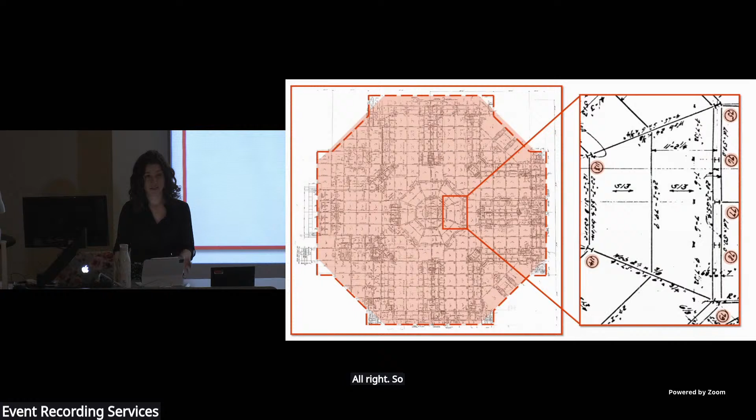All right, so the original building is octagonal, but it technically has 16 sides as the octagon is intersected with a cross. The building is organized on a rectilinear column grid, and one of my favorite pieces of trivia regarding this is that instead of identifying locations with column grids, like you see normally, they numbered their columns. 75, 76, 77, 78, 79, column 113, and column 114.

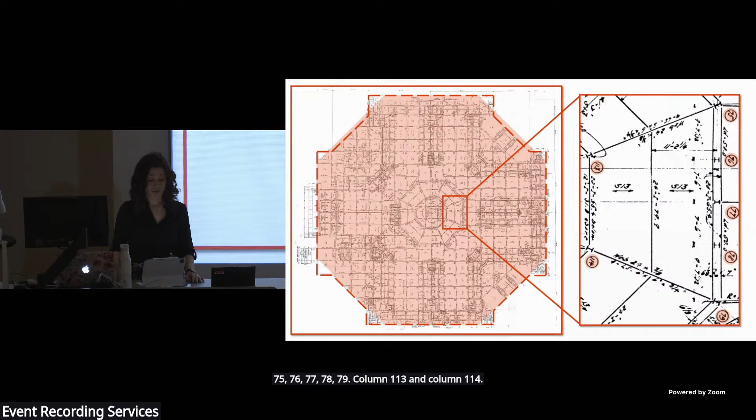Shedd still uses this numbering system today. If you go into their building in the back of house spaces, you will see the columns with their number painted directly on them. Later, we will talk about columns 227, 228, and 251A, and column 88.

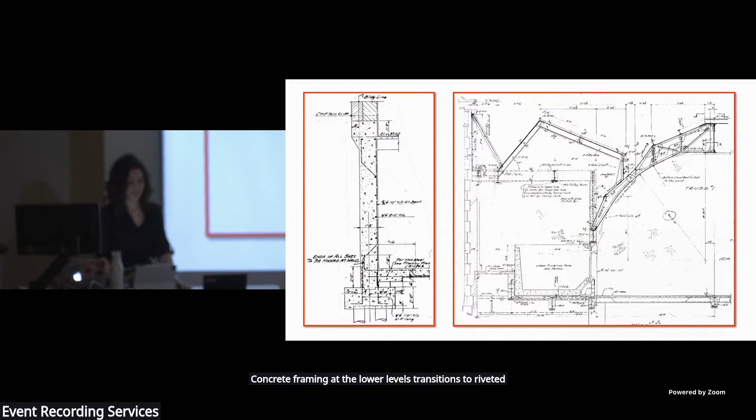All right, the building is supported by a hybrid structural system. Concrete framing at the lower levels transitions to riveted steel framing encased in concrete fireproofing at the main level and roof, with a 5-wythe load-bearing unreinforced masonry wall forming the building's perimeter and lateral system.

The structure rests on composite timber and concrete piles, and at the roof level, these are skylights that are over the original exhibits, and then this is a 10-foot tall parapet wall, which fortunately has an embedded steel frame that is braced back to the roof.

Much of the lower level of the basement was originally designed as reservoirs to store and filter the water. The original basins were located in these areas, and I know you can't read it, but they say live load of 500 pounds a square foot.

That's in the basement. Interestingly, in 1930, Shedd's saltwater exhibits were stocked with seawater, not by adding salt to Lake Michigan water, but by transporting nearly 1 million gallons of water by train from Key West to Chicago. Now, Shedd makes their own saltwater on site.

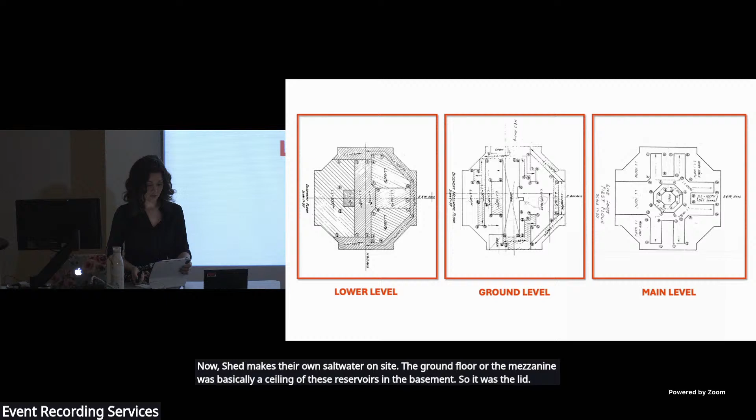The ground floor, or the mezzanine, was basically a ceiling of these reservoirs in the basement. So it was the lid. It was a 5-inch thick concrete slab, 33 KSI rebar. It had a live load capacity of 10 pounds a square foot. Now, if you think about current code, a live load of 10 pounds a square foot is for uninhabitable attic spaces with no storage.

This limited slab capacity has created many challenges for Shedd over the past 5+ decades specifically, and we'll talk about some of them in more detail later. Some locations have a live load of 50 pounds a square foot. These were drive aisles for the trucks that had the seawater to come dump them into the basins below.

And as mentioned, above the ground floor, you transition to steel framing, and then here's your main level, and you can see how they delineated these public spaces into each a gallery, and then behind the scenes spaces in the corners. They all have the same live load of 100 pounds a square foot.

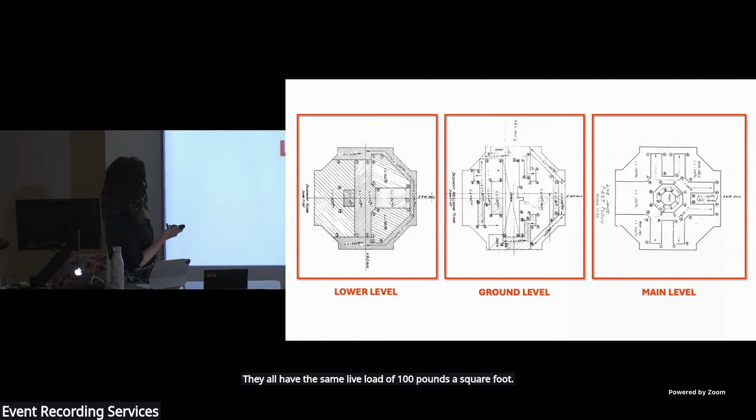All right, beginning around the 1970s, multiple renovations and additions have altered the building structure, expanding the useful floor space within the original footprint and increasing the aquarium's capacity to house animals. Klein and Hoffman has been involved in most of these projects since the 1990s.

Oh, whoops, wrong button. There we go. This button.

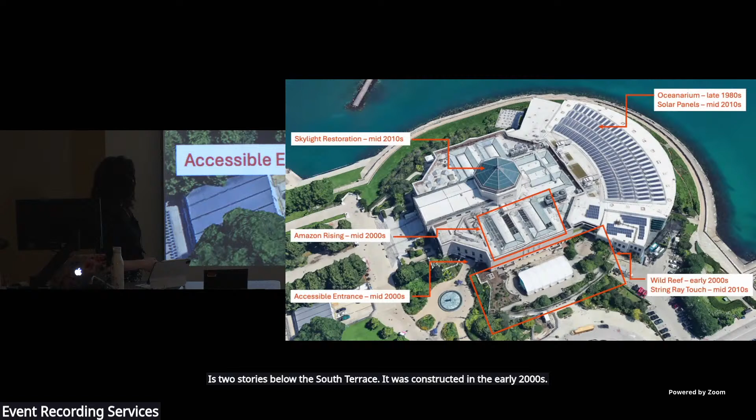So the Oceanarium was the first major addition. It was built in the late 80s and opened to the public in 1991. Wild Reef is 2 stories below the South Terrace. It was constructed in the early 2000s. The accessible entrance was added in the mid-2000s, and then here's this sculpture. It's called Man with Fish.

Amazon Rising was done in the mid-2000s. It completely redid the entire South Gallery. And then in the mid-2010s, the Rotunda skylight was completely replaced. It improved its function, and it also restored original design elements that were lost during the prior skylight replacement in the 1960s. Solar panels were added to the roof of the Oceanarium. It was the first such installation in the city of Chicago.

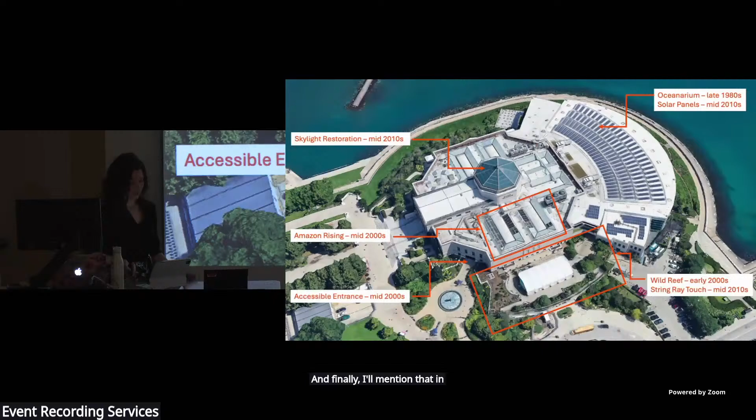And then the Stingray Touch was added to the top of the South Terrace. This is a seasonal exhibit, May through October, I think. And then a myriad of other exhibit enhancements and behind the scenes concrete repair, waterproofing, masonry repairs, way too many to list, that we've been involved with in our 30+ year relationship with the aquarium. And finally, I'll mention that in 1987, Shedd was placed on the National Register of Historic Places.

All right, so as you can see, Shedd has been very proactive in adapting its building since its opening almost 100 years ago. And ahead of its centennial year in 2030, Shedd Aquarium unveiled a strategic plan called the Centennial Commitment to accelerate its mission and prepare the iconic institution for the next 100 years of service. The plan includes an ambitious experience evolution that will restore the aquarium's historic architecture, modernize the experience for guests, upgrade life support technology, and create more expansive, realistic habitats for animals.

The experience evolution process began in 2018 with an extensive research and master planning process aimed at redefining the visitor experience while maintaining a deep commitment to animal care. A multidisciplinary team, including experts in human factors design, exhibit design, and architecture, created a visitor-focused, actionable plan. As the project progressed, the design team expanded to include 18 specialty consultants, necessitating careful collaboration at every stage.

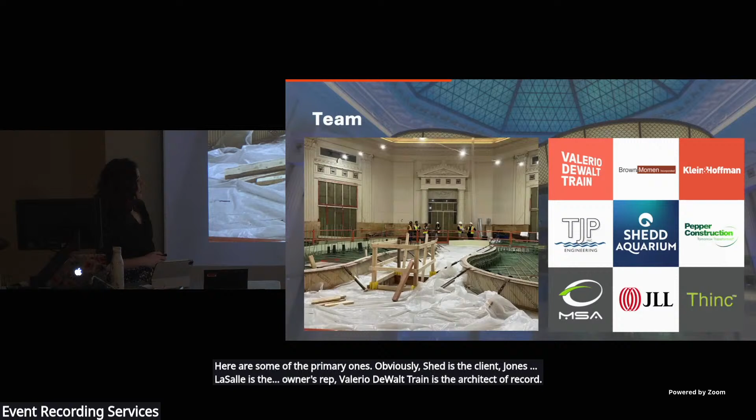Here are some of the primary ones. Obviously, Shedd is the client. Jones Lang LaSalle is the owner's rep. Valerio Dewalt Train is the architect of record. Brown & Momen and Pepper Construction are a joint venture GC. TJP is the life support systems engineer. That is everything that goes into the animal habitats, so the filtration systems and things like that. MSA is your mechanical engineer, and Thinc is the exhibit designer.

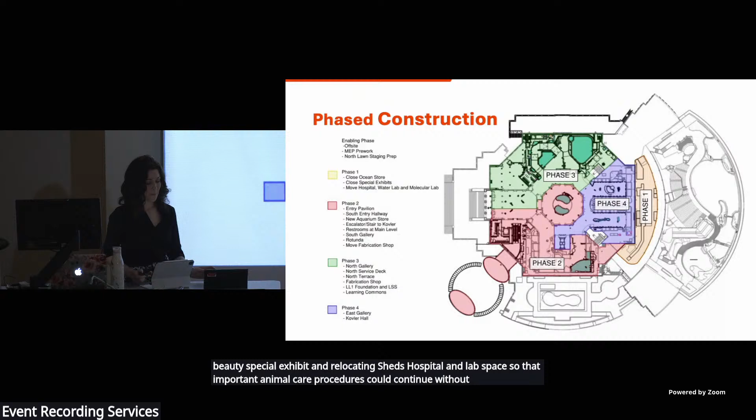All right, so the experience evolution is split into 4 phases, or really 5 if you want to count phase 0, which was an enabling phase. So what that means is before construction began, the aquarium temporarily relocated animals from their public habitats to environments behind the scenes where they could continue to receive quality care while their new habitats were constructed. Phase 1 was also behind the scenes. It involved closing down the Underwater Beauty special exhibit and relocating Shedd's hospital and lab space so that important animal care procedures could continue without interruption. We'll dive into phase 2 in a minute.

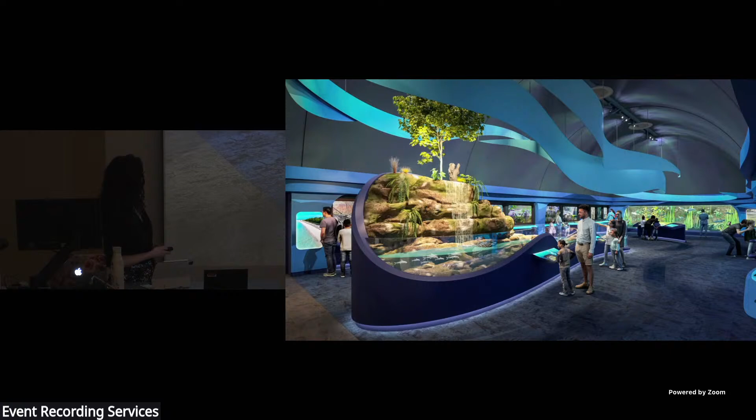The project is currently in phase 3, which completely reimagines the entire north section of the building. And here are a couple of renderings that have been released to show what's to come in phase 3, which I believe will open in 2026. Phase 4 is probably the smallest phase in terms of cost and scope, and it primarily involves non-structural exhibit enhancements to the original East galleries. And it also will be when the entire Kovler Hall is reopened. All right.

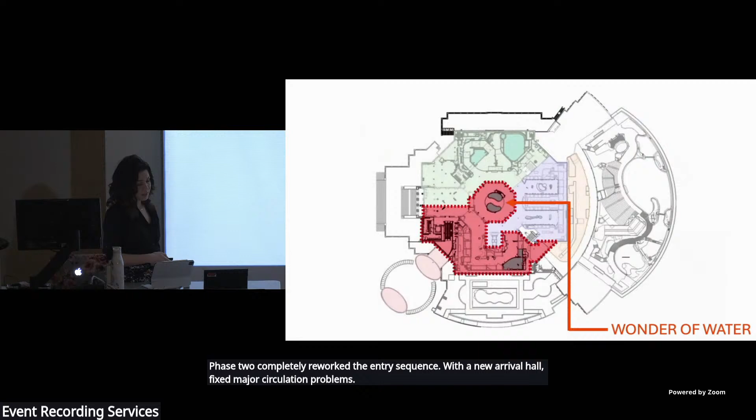Throughout construction, Shedd has remained open. This is a logistical feat requiring precise coordination to maintain animal support systems, visitor pathways, and operational back-of-house spaces. Every phase prioritizes visitor access and uninterrupted experiences. Now, back to phase 2, the topic of this presentation. Phase 2 completely reworked the entry sequence with a new arrival hall, fixed major circulation problems, and reimagined several exhibits, like the center exhibit and the Arapaima habitat in the South Gallery.

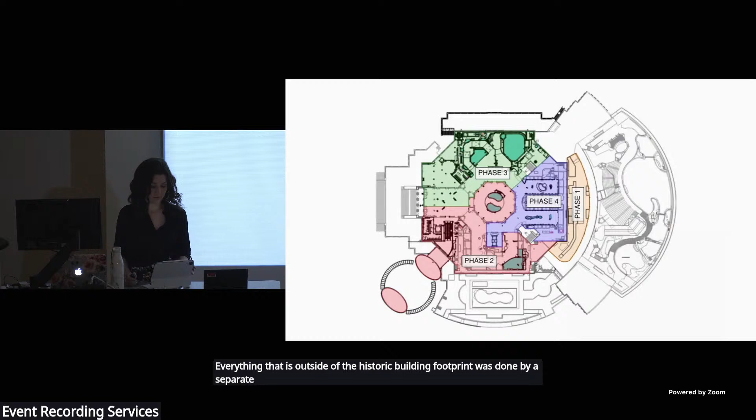All right, you may have noticed that I have not mentioned this little piece down in the southwest corner. This is the new ticketing pavilion, entrance pavilion, and then these trellis features that surround the Man with Fish sculpture. Everything that is outside of the historic building footprint was done by a separate engineer of record. It's kind of unique to this project, but in this case, Thornton Tomasetti designed the entry, ticketing, and trellises.

And maybe someday you can hear Thornton Tomasetti talk about this project because it was challenging. Even though it's small compared to everything else going on in the historic building, there were so many challenges. They had to redesign foundations about 3 times due to undocumented obstructions below ground, but that's for another time. Maybe that'll be a tease. You can get another speaker. But I can give you a little bit of background information on that entry.

So when Shedd was first constructed, the main entrance was through these grand stairs on the west. However, once the accessible entrance, which is here on the southwest corner, was added in the early 2000s, that became the primary point of entry. And then during the master planning in 2018, research did confirm that 85% of visitors do approach Shedd from the south, prompting the creation of a new plaza for a seamless, accessible arrival experience.

The landscape plaza and lightweight trellis unify the outdoor space while preserving sightlines to the historic 1930s building and incorporating wave-like motifs in the trellis that you can see there, complementing all the other aquatic motifs found throughout the building. The pavilion roofs are delicately positioned to maintain views with materials selected to complement the white Georgia marble of the original structure. All right. Now, once inside the building, the handcrafted plaster wave wall right here extends that plaza's trellis motif, creating an immersive aquatic aesthetic in the beautiful interplay of light and form in a brand new 2-story arrival hall.

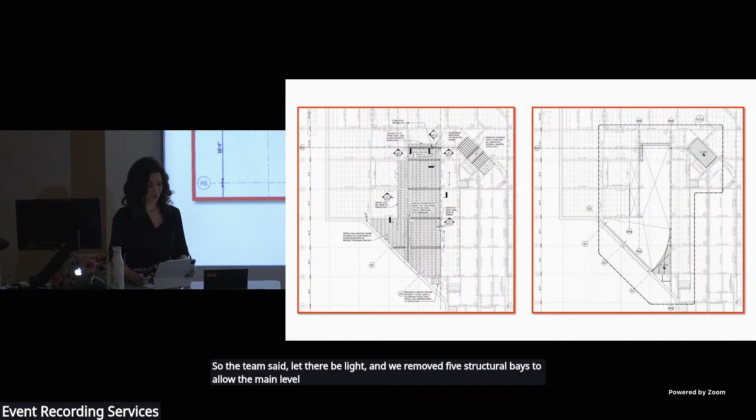This area was previously pretty dark and somewhat uninviting, and a stated goal of the experience evolution was to establish an open, welcoming experience. So the team said, let there be light, and we removed 5 structural bays to allow the main level windows to bring daylight into the new entry hall. So let's talk about how we achieved this.

So removing floors is always good for your gravity loads. It takes load off your columns, it takes load off your foundations. However, it means that you now have columns with double the unbraced length. So we had to check all those, but fortunately they were robust enough that we did not need to reinforce any of them.

As I've stated before, the perimeter masonry wall is load-bearing. You can see up here how the roof framing frames right into the wall. And it's also the building's lateral system. And it has a 10-foot parapet wall, I mentioned that earlier. So removing this floor down here, though, means that this wall is now 32 feet tall, unbraced for out-of-plane wind load.

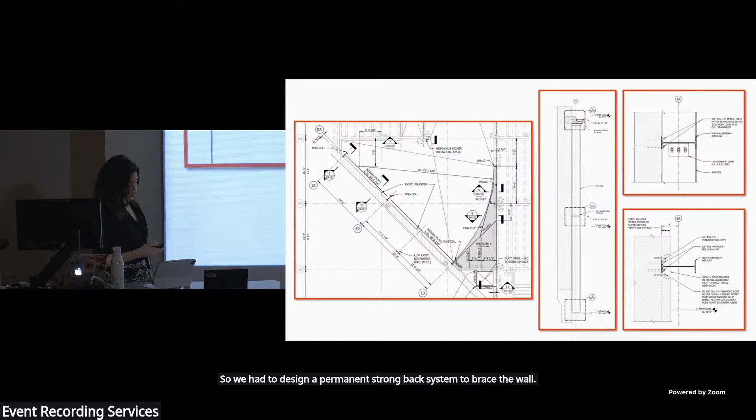And even though it's 5 wythes and it has pilasters every 16 feet, it's not going to work for that kind of span. So we had to design a permanent strong back system to brace the wall. And so if you'll notice, basically we installed columns.

I gotta get this button right, boss. Back, there we go.

So we basically installed columns roughly adjacent to where the pilasters were, and then the whaler is turned sideways so that the strong axis is oriented parallel to the applied load. We also had to mechanically attach the whaler to the wall for pressure and suction.

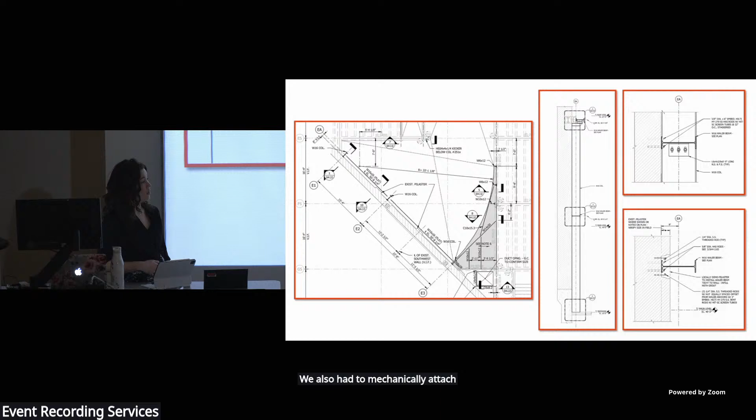Some modifications were required at the roof level due to the original drawings not being completely detailed, and so once the demo of the ceiling happened, we could actually see the roof structure. We knew that some of our original details weren't going to work. So these ones up here were not our original design, but you can see that the actual installation matches pretty well. That's always nice to see when you see your 2D drawing in 3D real life.

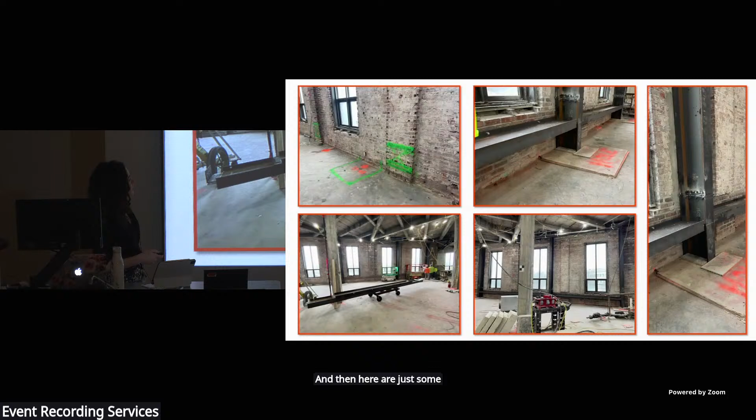And then here are just some photos of the process. So again, the strong back system had to be in place before the floor could come out. So what they did is they demoed small portions of the slab to install the columns. They had to demo part of the pilasters so that the whaler could sit flush against the wall for the whole length.

Once they got the columns installed, they did their splice, and then here's the horizontal whaler getting ready to be installed. Once everything was in there, you could see the bolts connected there, then they could take out the floor. Yeah, there's the strong back system in orange. There's so much going on in here, it's kind of hard to see without that highlight.

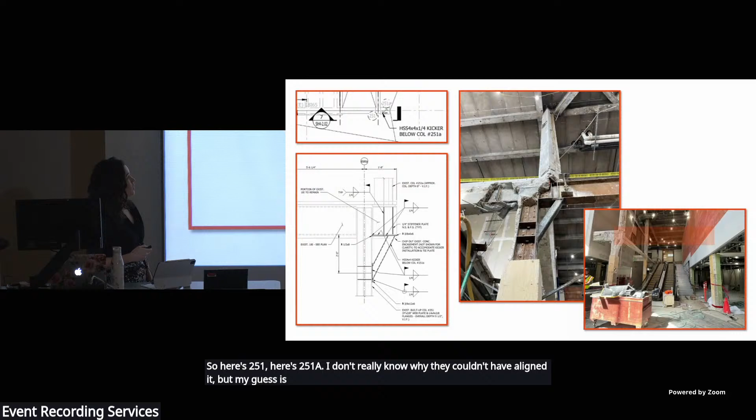Now, before I get into the escalators and the stairs, I want to talk about this column. It's a little hard to tell in this image, but the enclosure around this column is substantially wider than this one. Now, why, you ask? Well, I'll tell you. This is column 251A up at the top, right here in plan, and you can see that it is off-center and skewed from column 251 directly below it. So here's 251, here's 251A. I don't really know why they couldn't have aligned it, but my guess is putting 251A at this location simplified connections up at the roof level, and they probably never thought that this girder was going to want to be removed.

So we were supposed to remove this girder because it's right in the middle of our double height space, but we couldn't remove all of it. And this is not a moment connection, so we had to install this kicker to resolve that off-center load. So once all that was installed, then they could cut that girder, and you'll see it is gone from there.

All right, so now back to the escalators. So we had to add framing at the top of the escalator to support the operational load of the truss, the escalator truss, and also to support the edge of the original floor slab that we had cut back. So if you'll notice in this detail, here's our plan, and here's the section. If you notice, we have a tube and a wide flange shape.

That was not the original intended design. Originally, this tube was located where it needed to be for the escalator, and then the floor slab was supposed to be cut right on the other side, and then this little stiffened angle down here was supposed to support the floor joists beyond it.

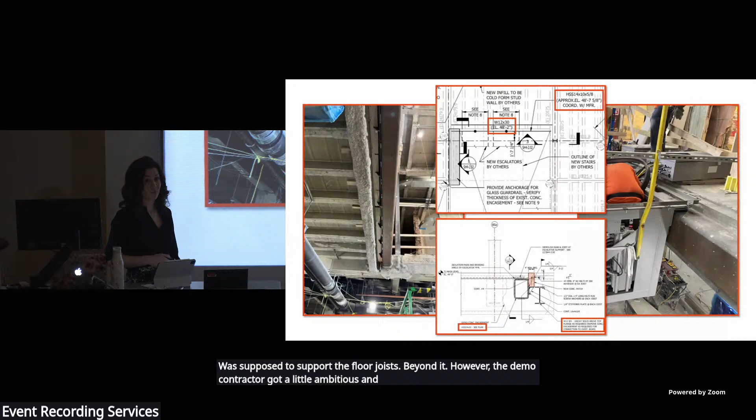However, the demo contractor got a little ambitious and demoed the slab back before he had coordinated the exact location with the escalator manufacturer. So that meant when it was all said and done, the opening was 4 inches too big. So the simplest solution at that point was to specify a separate member, in this case our W12, which is right here, to support the edge of these joists that had been cut. And then that stiffened angle on the side of the tube is now just supporting that 4 inches of new concrete that we had to infill.

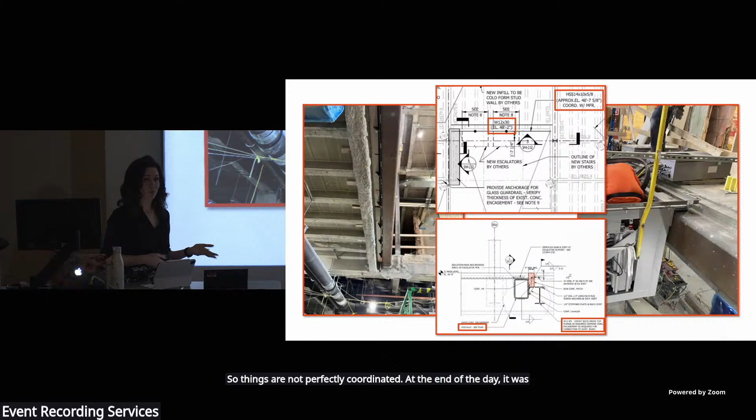So stuff like this happens, right? Things are not perfectly coordinated. At the end of the day, it was the general contractor that should have pointed out to the demo contractor where he should have cut, but it happened. It's 4 inches. You got to work together as a team to come up with the best solution for the entire project. So that was one small little change we had to make there.

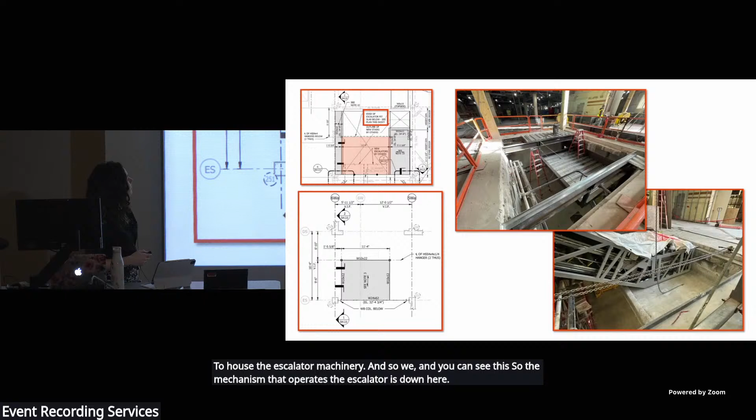Then at the bottom of the escalator, we had a pit to house the escalator machinery. And you can see this, so the mechanism that operates the escalator is down here. It's a little hard to tell from this photo, but we had to make this as small as possible, as shallow as possible, because this space below here is an LSS room, life support systems room. So the equipment and filters in this space absolutely could not go offline. They needed access to them. And the door to get in that room is right to the north of our escalator pit here.

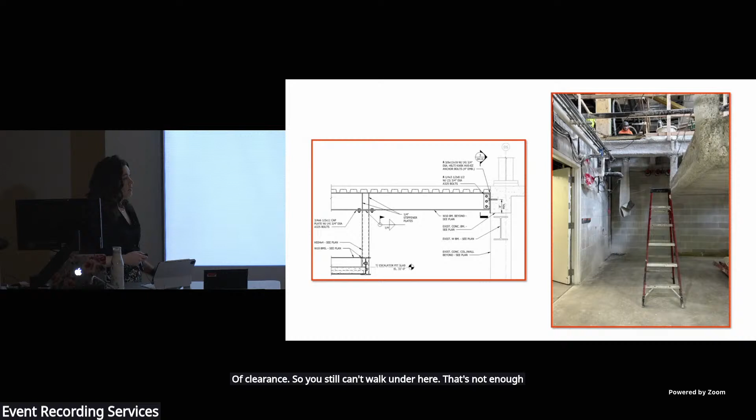So we squeezed as much space as we could so that there's still enough room to come in these doors and then get to the rest of the filters and stuff in the space. And in our detail, you'll see that we actually tucked the slab up into our framing. Normally you have your framing and your slab sits on top of it. Well, you can also do it this way and save yourself 12 inches of clearance. So you still can't walk under here, that's not enough height, but it's sufficient for Shedd to still use the space for storage and things like that. So that was a must on their end.

And here are just a few photos of the installation. On an escalator, this is called the truss. The two sides are trusses. They come to the field like that. It's installed, and then each of the stair treads is installed one by one once the truss is in place.

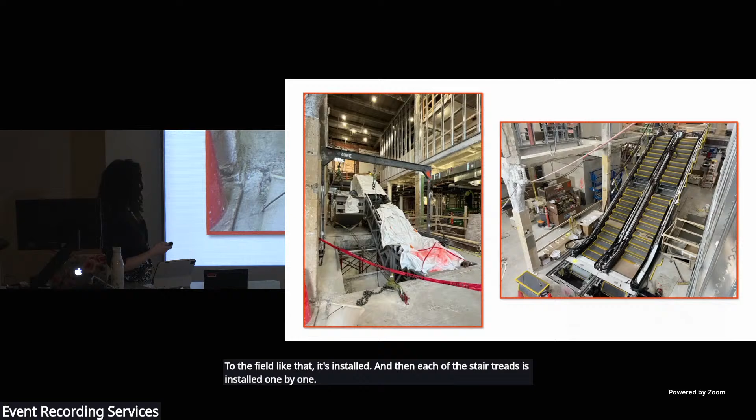All right, now on to the stairs. The stairs were pretty straightforward, but they did impose a large point load at the base and the center. The center landing post did impose a load on our ground level structure. And remember, our ground level structure has no capacity, more or less. So we needed to reinforce, but we didn't have access from below, so we designed an option to reinforce from above. We basically designed a steel beam that was stiff enough to span column to column, with stiffeners where the supports from the stairs would land.

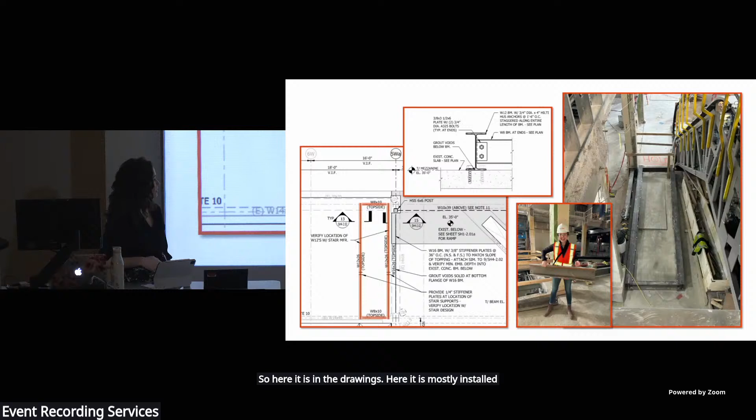So here it is in the drawings, here it is mostly installed, and then before they installed this 8x10, I asked if I could pick it up to prove that I could pick it up. So I did.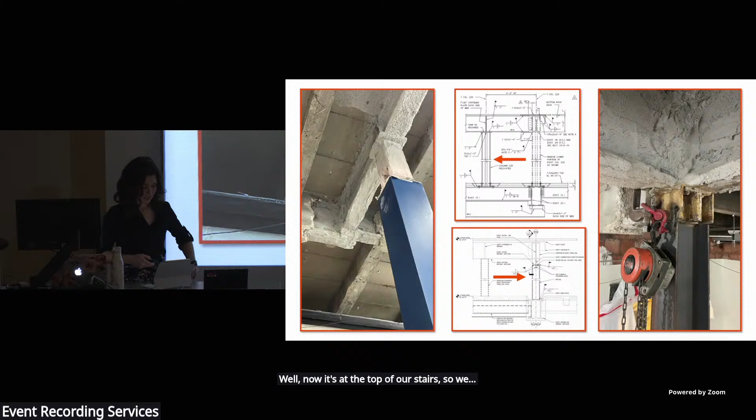So the moral of that story is that not every renovation has to be forever. And this is a brand new column. We decided that one column should only have to move once in their life, and so we put a new one there.

And then above the escalator and the stairs is a one-of-a-kind art installation by a local Chicago artist called Once and Forever Lake Michigan. This looks really dense right here, but it's really very light. I think because this photo is dark, you can see it more, but this is basically a bunch of fishing line that hangs, I think, 1,600 fish. It's all supported off of the original roof structure, and so our role for this art installation was to analyze the roof structure and provide the artist an allowable design load for their sculpture.

And then we'll close out this section by comparing the rendering on the left with the completed construction photo on the right. Does anyone notice anything? What's that? Yes, the stairs. The stairs are switched. The stairs were supposed to be over here, and now they're on the east side. So that is because you'll notice that these escalators are wider than normal in the rendering. That was the intent. However, there was a discrepancy between the drawings and the specifications.

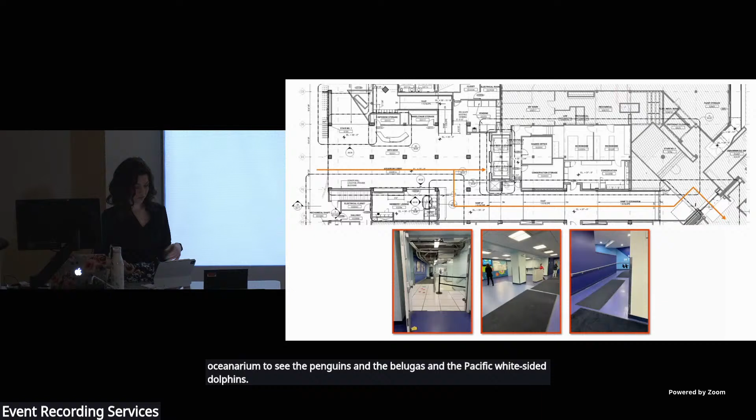But previously, to get to the oceanarium or the Wild Reef, you had to go up the stairs, then go around the rotunda, and then find the elevators to go down 2 floors. Or you had to go find the 2 stairs that go down to the oceanarium. It was very convoluted. And so this streamlined circulation pathway was a huge goal of phase 2 specifically. And what this space was previously was, I think, a lunchroom. There's some offices on the sides here. It was just a really weird, not well utilized space.

So that's a relatively simple renovation, we're just adding a ramp, right? Not that big of a deal. Well, remember when I said that the ground floor had a capacity of 10 pounds a square foot, and it created problems for Shedd for like 50 years. So basically, what each of these hatches represent is a different renovation, a different repair, a different structural system. For example, this space right here used to be completely open to the basement below. And so this is a composite steel framing that was infilled in the 1970s.

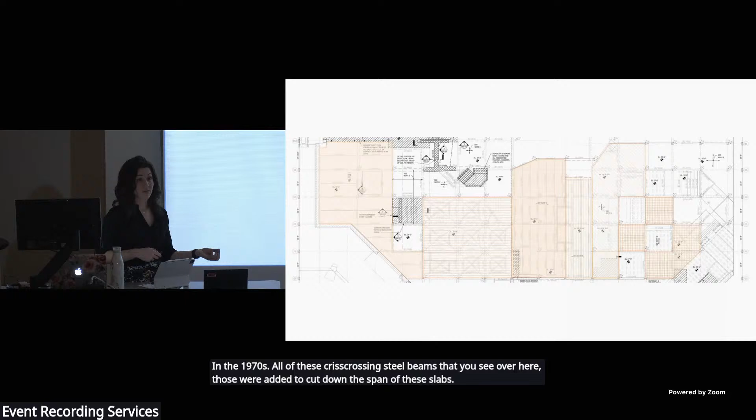All of these crisscrossing steel beams that you see over here were added to cut down the span of these slabs that only have a 10 pounds a square foot capacity. This here is a bonded overlay, which increases the capacity to, I think, 50 pounds a square foot, maybe 100, I don't remember. But basically, Shedd had all this documented, which was super helpful, but it was a lot of documents we had to sort through to understand exactly what was going on to create our ramp down here. Anywhere there's not a hatch is the original structure, and then there were 7 different iterations that we had to look through for our analysis.

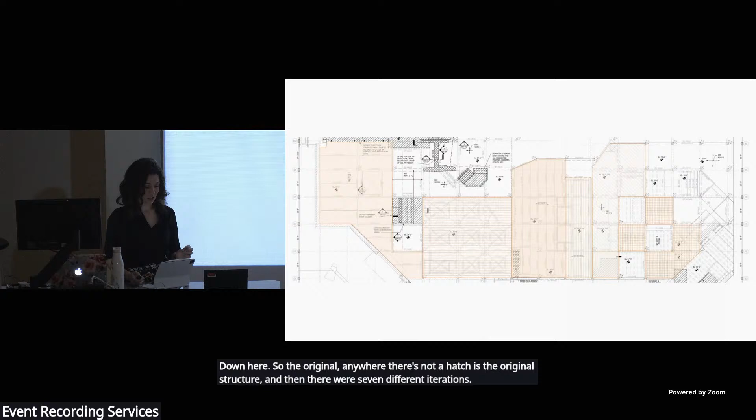So here's that ramp that I was talking about. So obviously we had a big elevation difference. We're at roughly 35 feet here, and we're going to 39.6 over here. So to reduce the amount of load that we're adding, we opted for a thin concrete slab on metal deck, supported on metal stud knee walls. So that was about the lightest structure we could do.

And fortunately, all those prior repairs and reinforcements that Shedd had already done made it so the slabs worked. We didn't need to reinforce the slabs. However, several of the beams along the perimeters were failing; some were failing in flexure, and all of them were failing in shear. So we had to reinforce them.

So this was our original detail. It was basically an underside and a topside reinforcement option. We added longitudinal bars here to increase the capacity in our tension zone, and then this bar here gives us the missing shear capacity that we didn't have.

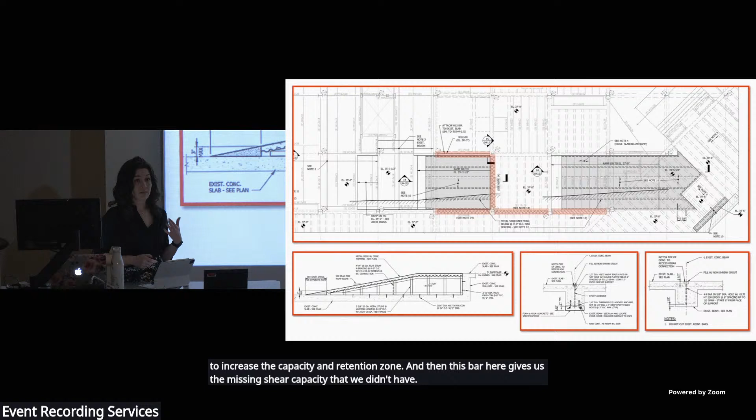However, during construction, there were one or two locations where we absolutely could not do anything from below due to LSS piping that could not be relocated. So fortunately, in those cases, the beam wasn't failing in flexure, it was just failing in shear. So we were able to just install the shear reinforcement from the top side.

And here's a few photos of the construction. So here's those knee walls being started, metal deck is added, and then the concrete is added after that.

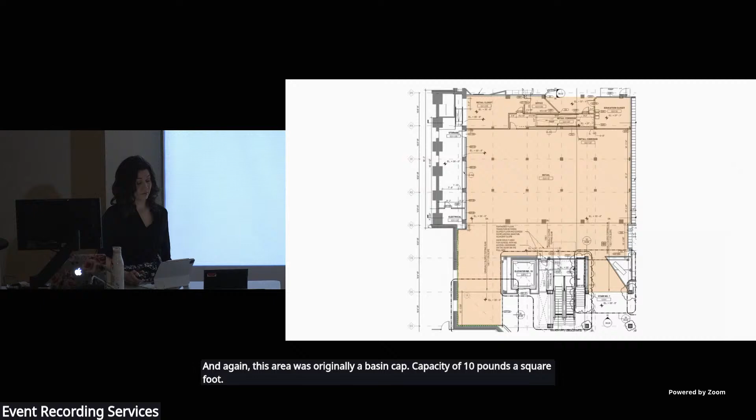All right, now moving back to the arrival hall. So here's that golden elevator, escalators and stairs. Behind it is the new gift shop. And again, this area was originally a basin cap, capacity of 10 pounds a square foot. A gift shop needs to have 100 pounds a square foot loading. So this area in the 70s became the education wing with the classroom loading of 40 pounds a square foot.

So I mentioned Shedd has excellent documentation; of any building I've ever worked on, they by far have the best record keeping. However, this is one set that really needs some work. We have two sheets for this education wing. They all look like this. You can't read half of the general notes.

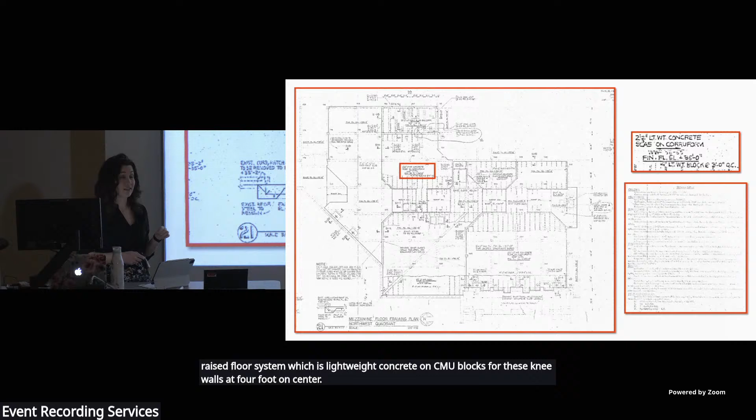We can see that they did a raised floor system, which is lightweight concrete on CMU blocks for these knee walls at 3 foot on center. There's nothing in here that indicates that the slabs that this system is sitting on were reinforced. So it's clear that they were trying to spread the load. I don't know if they were thinking, okay, we're gonna make it linear and now it'll work versus a uniform load. But you're adding dead load. You're also adding live load because you're going from 10 pounds to 40 pounds of live load.

And I don't know. This is one big question mark still. We don't know what is going on here. But anyway, that's a mystery that will never be solved. So now it's no longer the education wing. The classrooms are moving up to the main floor during phase 3 of the project. Now it's the gift shop. So we've got 10 pounds capacity. We need to get to 100. How can we do that?

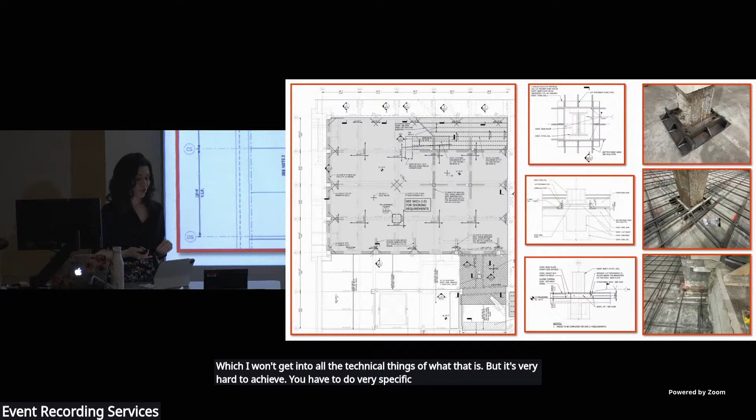So there's a couple options we looked at. There's something called a bonded overlay, which I won't get into all the technical things of, but it's very hard to achieve. You have to do very specific surface preparation to the base slab that you're pouring your new slab on top of. And you also have to test that bond. And lots of times it fails. So what's your backup plan if it fails? Furthermore, you're limited in the amount of capacity increase that you can achieve. I don't think a 10-fold increase would have been allowed by code.

We also looked at reinforcing by adding steel framing below the slabs. This would allow us to cut down our span, but we didn't have access in all areas, so that didn't work either. So what we ended up doing is we designed a new 6-inch cast-in-place slab using the slab that was there as the formwork. However, that needed to be shored for the wet weight of the concrete.

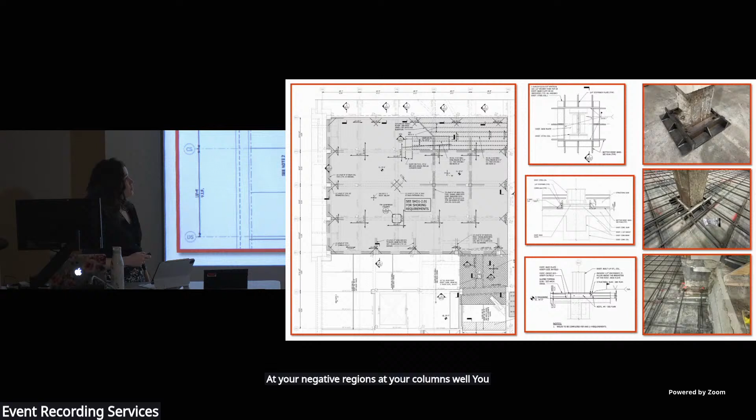And this is also the area where we're transitioning from concrete framing to steel framing. So how do you develop your moment at your negative regions at your columns? Well, you install these really robust steel angles, and then you weld your rebar to them. And in some cases, this is kind of hard to see in this photo, but this base plate was like 2 inches thick. So we were fine with welding directly to the base plate, and we could omit those angles at a couple locations.

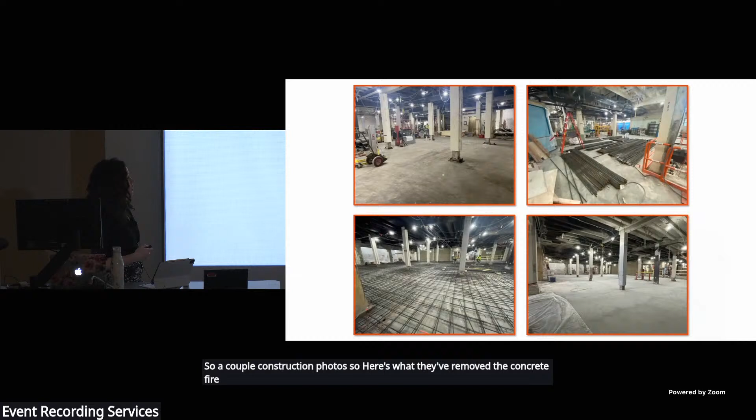So a couple construction photos. So here's what they've removed: the concrete fireproofing, the concrete encasement around all these steel columns. They're starting to install the steel angles. Here's the staging for all the rebar. Here's rebar installed. Obviously, you can see visually where you have darker rebar is where you have your higher reinforcement for your tension zones. And then this is the completed slab. It looks basically just like this one, only you can't see the very base of that.

All right, so that was the gift shop slab. Now, the most complicated part with the gift shop slab was the entrance, which, actually, I'm going to go back a few to show you. So here's the architectural plan. So this is their entrance to the gift shop. And column 227 is located like right there. So basically, so I think this is our third column. So 227, oh golly.

So here's the historic west stair going up from the ground level up to the galleries. That's the stair opening right here. The corner of it is column 227. Column 227 goes down to the ground floor and lands right there. There's no column below it, so it's on a transfer girder. Three transfer girders to support column 227.

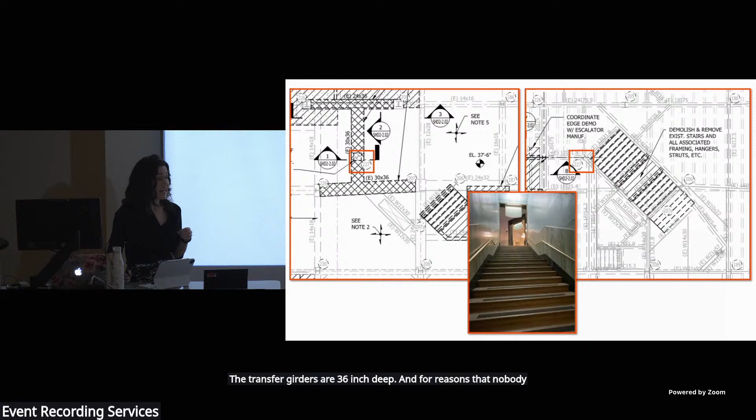The transfer girders are 36-inch deep, and for reasons that nobody knows, 18 inches of that transfer girder are above the slab, and the other 18 inches are below the slab. I feel like they probably did that because they needed the space below, so they didn't want a 36-inch beam going into the basement level. And the ground floor, remember, was unoccupiable, basically. So an 18-inch tall curb wasn't really a big deal 100 years ago. Well, now it was a big deal.

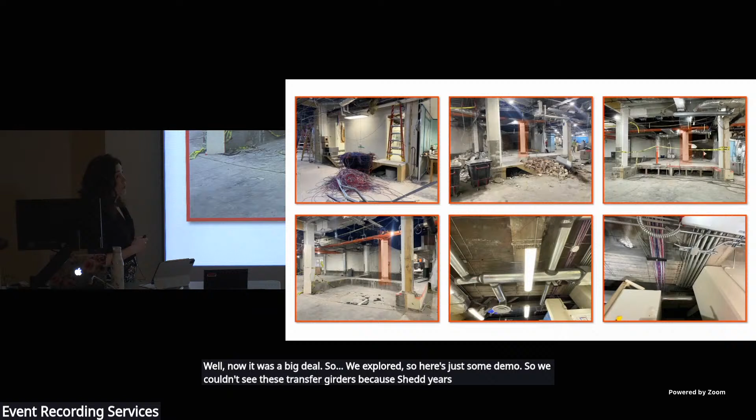So we explored, so here's just some demo. So we couldn't see these transfer girders because Shedd years ago had installed a raised floor system, and this was like an IT room. So it wasn't until they demoed that we could finally see, yep, those transfer girders are exactly like they are shown in the drawings.

So we looked at getting rid of the column. Was there a way to completely reframe the main floor that it was supporting so that we didn't need a column at this location? But you would have to cut out so much of the main floor to put back an efficient system. So that was nixed.

Then we looked at, well, could we add a column below here? Below here is a staff lunchroom. Could we add a new column below here with a smaller foundation so that this load just goes straight there, and then we don't need any of these transfer girders? Well, anytime you say the word foundation, the costs quickly escalate. So that wasn't an option either.

Oh, and then before I go into our solution, so these are the beams from below, and then notice this data tray and these conduits. These two items serve Shedd's command center, which, as I understand it, monitors basically every system, every habitat, every filter, how much solar energy is being pulled in from the panels. All of that goes into the command system. So these guys were not going anywhere.

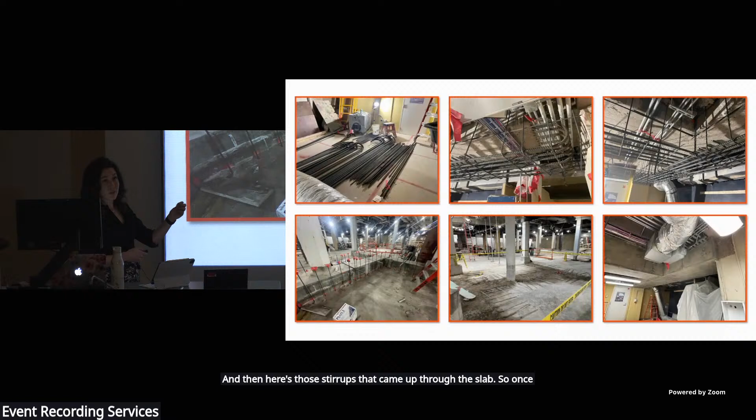So again, staging for our rebar, and that's installed. A number 9 with a 180-degree hook is a very big deal. Try to avoid it if you can. And then here's those stirrups that came up through the slab. So once the rebar below was installed and the concrete was poured and it was cured, then they bent these bars into the slab like so.

They demoed the transfer beams, and then here they did do a bonded overlay reinforcement. This was just in one bay, so we were more comfortable doing that here versus the gift shop solution where that was like 16 bays. And this is what it looks like below. So it's much deeper than it was, and it's a little hard to see in this photo, but those conduit and that data tray were basically cast right into the concrete. It's not going anywhere.

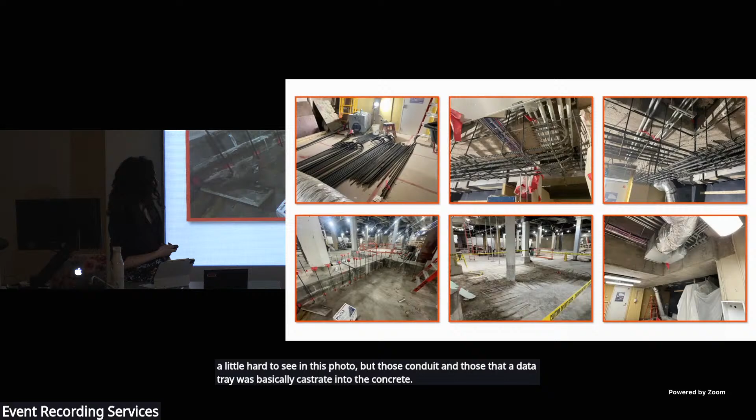All right, so let's move on to some exhibit enhancements, shall we? Is it really 6:51? Wow. All right, I'll go faster.

So the original Rotunda exhibit was called the Tropical Pool, but it was affectionately known as the Swamp. And it included a recessed area in the center for alligators and other swamp animals. And it wasn't until 1971 that the center exhibit was extensively changed into what most of us remember, the Caribbean Reef.

So the new transformational Wonder of Water exhibit had to fit entirely within that same footprint as the original swamp and Caribbean Reef. And the structural design of this exhibit requires a presentation of its own, and I'll do my best to provide a very high-level overview of the complexities and challenges. And for the sake of time, I will probably skip through some of it, actually. I'll just have to come back and tell you more about it.

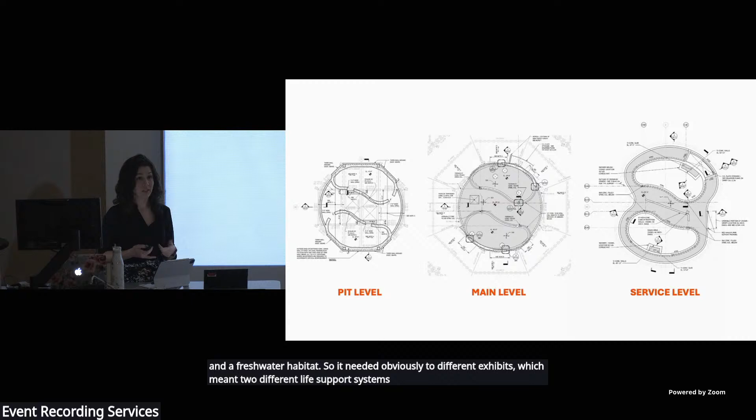But basically, the Wonder of Water was a juxtaposition of a saltwater habitat and a freshwater habitat. So it needed, obviously, 2 different exhibits, which meant 2 different life support systems, 2 different sets of plumbing lines. They had to be completely separate. 2 different lighting systems, because you're inside the building, and the saltwater tank has live coral, which needs very specific lighting for the coral to grow.

So, let's see. So obviously this is, hold on.

So this, with this very unique organic shape, we made it out of concrete, except for, sorry, except for these 4 columns right there. Those are steel tubes filled with concrete. The exhibit designer was very specific that he basically wanted a very thin vertical support there, and he gave us 8 inches square to work with.

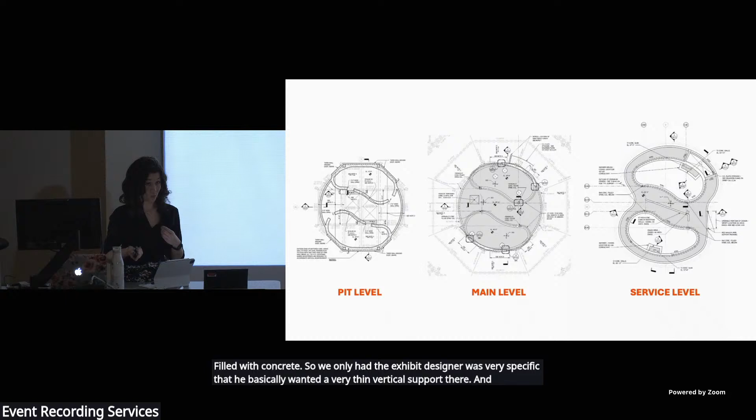So if you're talking about an 8-inch square footprint in concrete, you've got your concrete cover, you've got your ties and your vertical bars, you basically have nothing left in the center. So really, concrete filled steel tube was the only option. Right, these next slides have quite a bit of commentary, so I'm just gonna skip it all for the sake of time, but we'll go through the model.

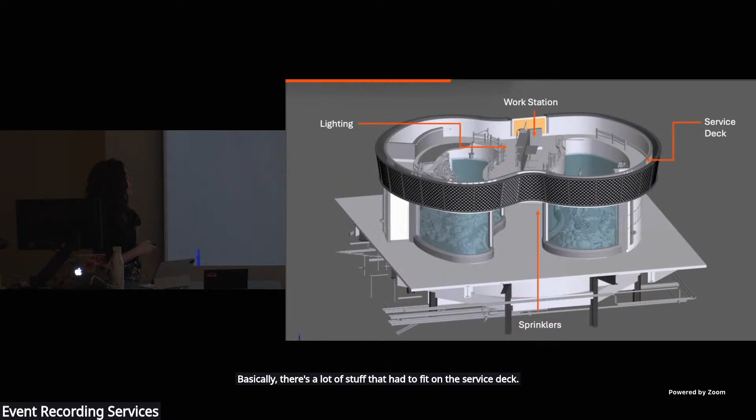Basically, there's a lot of stuff that had to fit on the service deck. We needed a continuous walkway around the entire thing, but we couldn't have any vertical supports beyond the service deck. Then you got your tanks. There we go. So there's one of our concrete-filled steel columns. Fortunately, we got an actual wall on this side, but then this is a beam that's supported here and it's supported here. So it's a curved beam that's cantilevering.

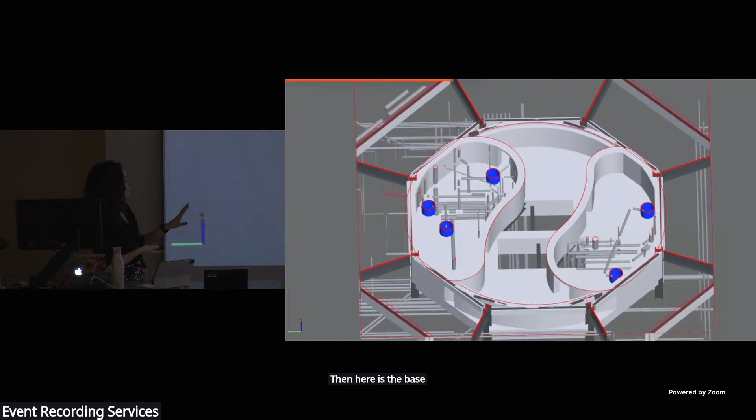Then here is the base below the tank slab. On the underside, now we're in that original pit. That's where all your life support stuff has to go. It's very congested under there. We don't have time to go through the analysis. There's a lot of unique stuff to talk about. And again, this presentation is an hour all in itself.

But we checked the original structure. Again, this is historic steel, 18 KSI allowable stress, but very over-designed for what we needed. So we didn't need to reinforce the plate girders or any of the columns.

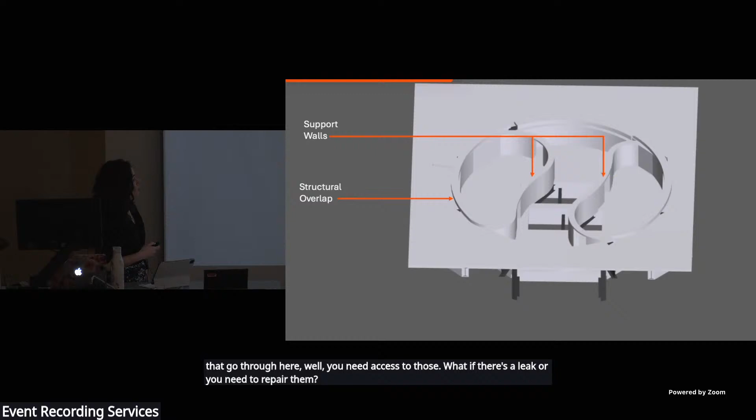So in the other image, you saw all of the life support pipes and stuff that go through here. Well, you need access to those. What if there's a leak or you need to repair them? So we accommodated 2 access openings in each of the tank walls so that a person could get in there and do future repairs if needed.

Now, the curves on this, there are, I think, 5, yes. So the design, the analysis really wasn't that complicated. The design, you've got your load, you can figure out what you need. It's the detailing that was so complicated because you can see with all of these curves, how are you gonna fit the rebar in there? So rebar can only be fabricated to one curve. And then it can lap with another one that's at a different curve.

So there were so many different curves. This is actually a very simplified view from what it started out as, but there were so many curves and so many lap splices. Plus we were using epoxy bar, so you increase your lap splices by 30%. So we were dealing with major rebar congestion issues. So fortunately, the exhibit designer was willing to work with us and simplify things a little bit.

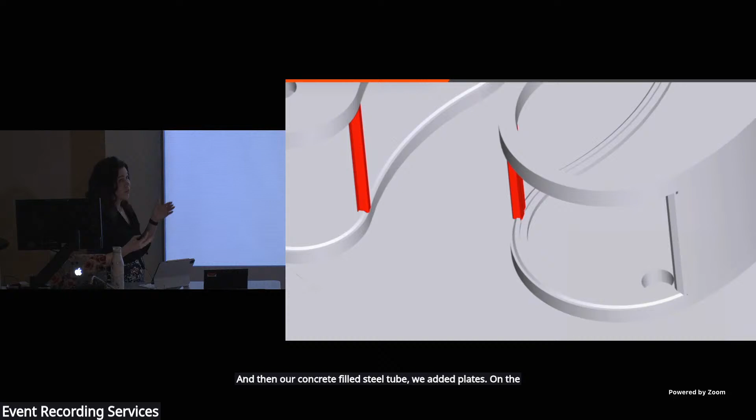And then, so you'll see the three window areas, that's where we had three pieces of acrylic. And then our concrete filled steel tube, we added plates on the acrylic side so that the acrylic could bear right up against that.

But again, like I said, we could present on that just by itself. So

Now let's look at some photos of the demolition and construction. So here is the Caribbean Reef. It was basically a big bowl that sat in that original pit. So here it's being demoed, and now you're seeing that pit being exposed, and then the openings that go all the way down to the basement that you can see right there are covered with a work platform, so you can't see them in that image.

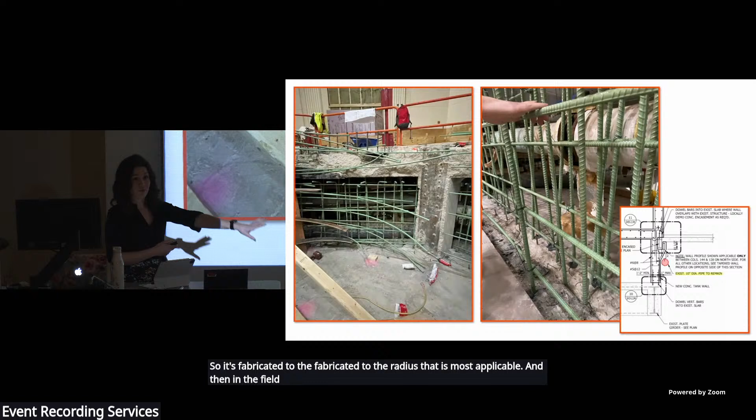So here, again, the rebar in here was so complicated. This is what I'm talking about when I say the rebar can only have one curve in it. It's fabricated to the radius that is most applicable, and then in the field, the guys basically force it back into the second curve. We had to remove the concrete encasement around this existing steel column just so we could get our clearances. And it's really hard to see, but we added Nelson studs to the beams down here just to tie everything together.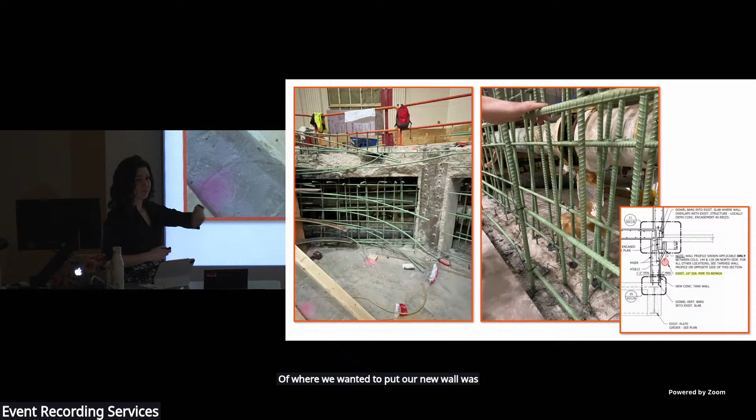And then here, this pipe back here is another life support system pipe that couldn't be relocated, couldn't go offline. And right in the middle of where we wanted to put our new wall was a flange. It basically turns the thing on or off, literally right there. So we had to create a box out for that flange so they could still operate it.

Here are those walls, the tank walls, and you can see here's the box outs for those access openings into the interstitial space, and then here are those openings that go all the way down to the basement level. And then here's the top of the walls. That curb needed to be poured.

Someday I'll get this right.

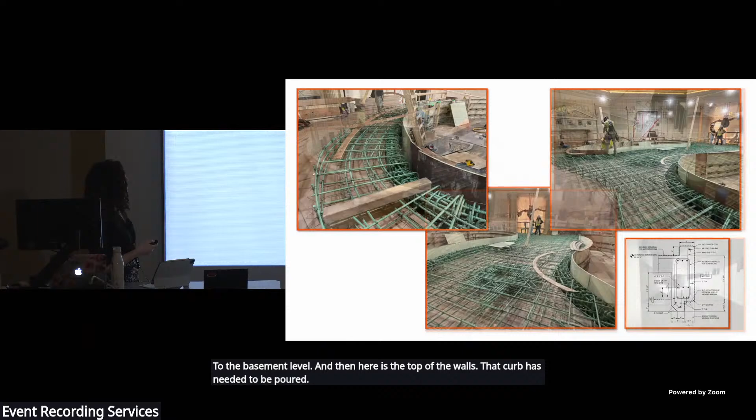Sorry, guys. So concrete is poured up to a certain level, and then we've got our slab between the exhibits to be poured. That's this one, and then the upper slab at the actual tank level is then poured with the rebar and all of this. All right, this one.

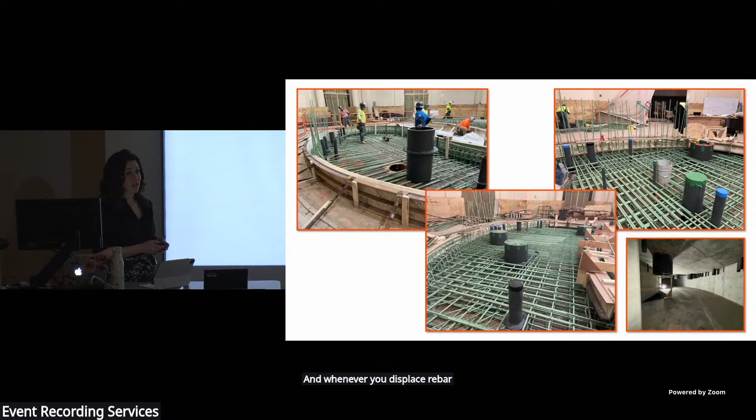So this one really shows the rebar congestion issues that we were dealing with. In this photo here, this is just part of the bottom mat of reinforcing. You've got your bars coming out from the perimeter walls, and then this thing is 30 inches in diameter. It's called a sump, and it's going into this hole. And then there's a second one that's going to be cut right here. Whenever you displace rebar for a penetration, you have to put the same amount on either side of it so that the load will transfer around it.

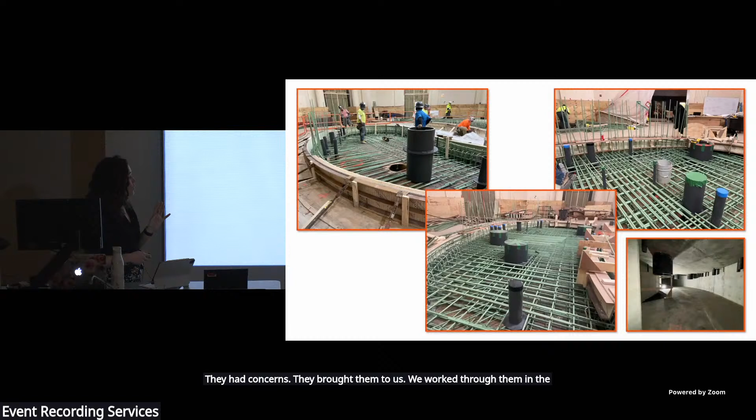And then you've got to do your top mat just a few inches away. So this is what it looks like when it's all said and done. Believe it or not, this is actually less congested than it could have been if the contractor had just straight followed our drawings and typical details. They had concerns, they brought them to us. We worked through them in the field to make sure that the bars we needed could be installed, but that there was still room for the concrete. Because honestly, in some cases it was so congested, there wasn't room for their vibrator to get down in there.

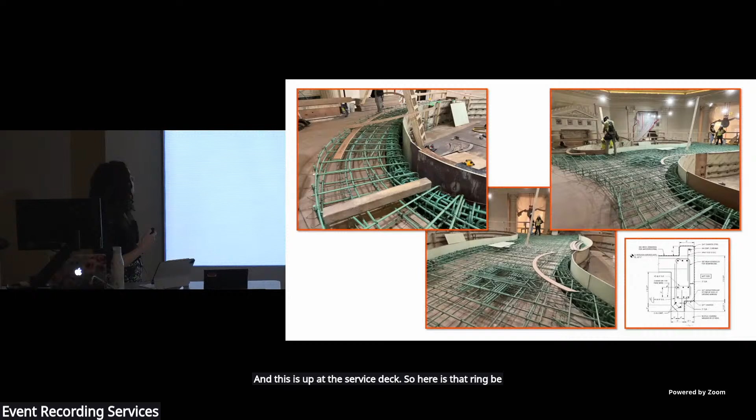And then here is just a picture of the space below once the slab was done. And this is up at the service deck. So here is that cantilevered ring beam that's going from a wall to the column over here. Here's another penetration in the slab, so you can see what I mean about the additional rebar around a slab penetration.

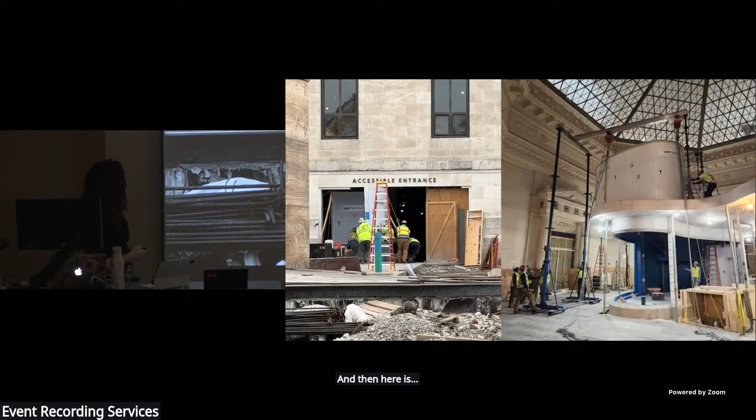And then here is them bringing the acrylic into the building. We actually did think about the maximum size of acrylic pieces that we could physically get into the building. And you can see we basically were maxed out in height.

Then because the openings have rebates on the sill, on the jamb, and on the head, the only way to install the acrylic was to lift it up over the service deck and then drop it into place. And you can see right there, it's touching the ring beam, and there's only a couple inches to spare over here. So this was very tight, but the contractor was fantastic and everything was installed, no problem.

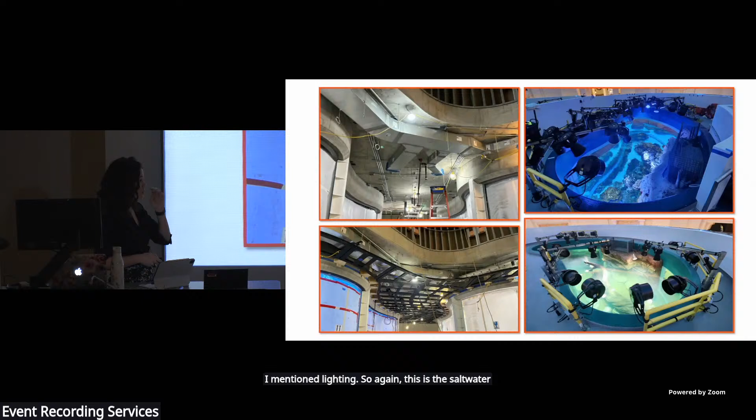And then lastly, just a few quick mentions. I skipped over a lot of the structural stuff, honestly, but there was so many other things with this tank in particular. I mentioned lighting. So again, this is the saltwater habitat and the freshwater habitat. They each have their own lighting requirements. You can't just put lights on the edge. You need to get them out over the middle of the tank for maximum effectiveness.

So these swing arm, but then how do you change them? Like if a bulb goes out, how do you get it back out there? You could get on like a little raft and go change it. That's what they've done before, but that's really not safe. And so these are swing arms, so you can rotate them back off to the service deck when you need to do maintenance to those lights. We went back and forth on these lights for so long. I have to say, this was probably the most complicated part of the whole project, believe it or not.

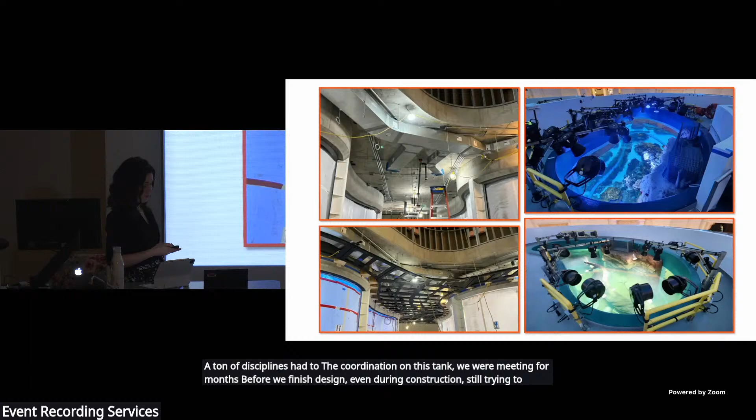And then underneath the service deck, this is an occupied space. This is where all the visitors go between the tanks. This had to be sprinklered, so we've got sprinkler lines in here. You got electrical, it needed to be conditioned, so you've got your ductwork going under there, and they didn't have a whole lot of space to work with either. So a ton of disciplines in the coordination on this tank. We were meeting for months before we finished design, even during construction, still trying to make sure we had the best, most efficient solution. So then closing this out, again, a comparison of the rendering and the final completed project. And I think the team did a pretty good job.

All right, this is the last section. So the Arapaima exhibit. This is another great example of repurposing the existing structure from a previous era of renovation. So Amazon Rising, as I mentioned before, was constructed in the early 2000s, and it utilized 36 KSI steel. So this was kind of right at the transition between using 36 and using 50 KSI steel standard. And this is an Arapaima. He is a prehistoric fish that can grow up to 10 feet long. And so this was his original habitat. It was like this L-shaped thing. For a long time it was fine, but he keeps growing and growing, and I think they have more than one. So he needed more space.

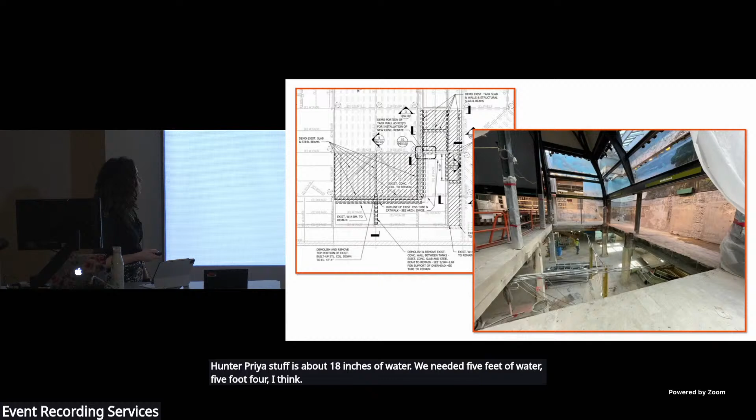So this L was his original tank. So we took this part. I don't know what was here, but we took it. And then we are expanding it out into this tiled space. So now this is all his swim area. So that was originally public space, concrete joists, 100 PSF, but 100 PSF is about 18 inches of water. We needed 5 feet of water, 5'4", I think. And so really the best way to do that was to remove what was there and go back with a new, more robust system. So we demolished the concrete joists and we went back with a composite steel frame system. So this is this, and here's with the rebar, and you can see right here, that is the rebate that the acrylic will sit in.

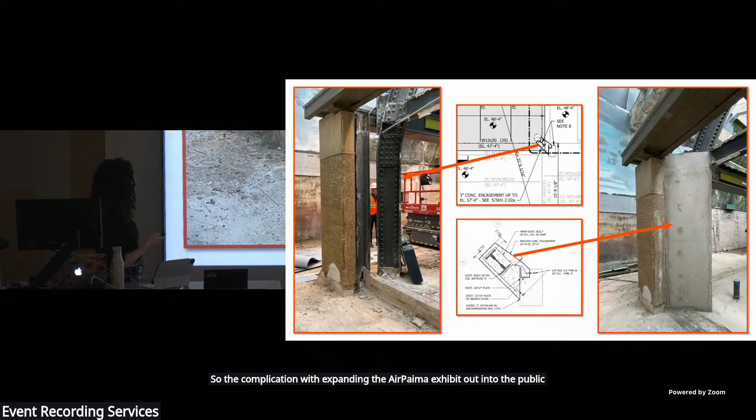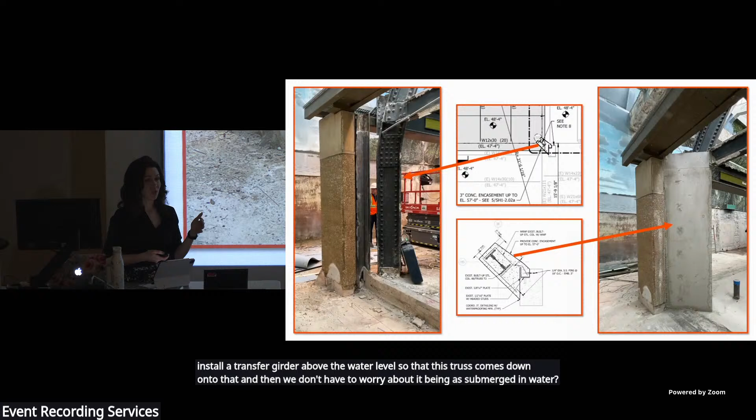Now, to our last column problem of the evening. The complication with expanding the Arapaima exhibit out into the public space is that this column is column 88. Column 88 is now going to be in the middle of the tank. Before, this white area was the original tank, and it was just outside of it. Well, this is supporting the corner of the curved roof trusses, so it's a pretty important column. And so we had thought, can we somehow install a transfer girder above the water level, so that this truss comes down onto that, and then we don't have to worry about it being submerged in water. But the size of transfer girder that we would need would be so large that it would take away from the exhibit experience. So we decided that it would stay within the exhibit and we would just protect it.

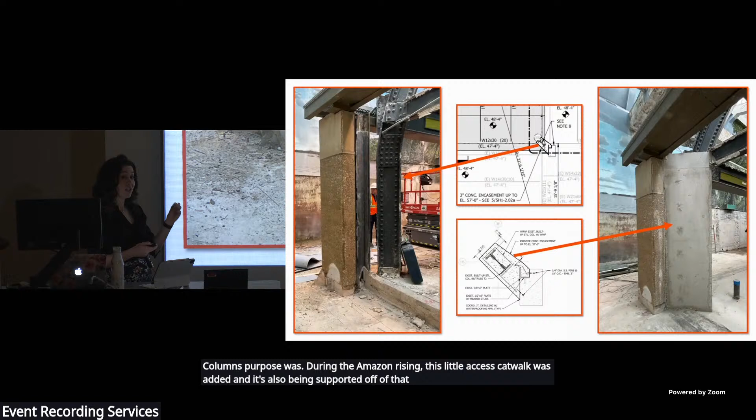So that's this column. Now this one, the concrete one, he's not supporting the roof. His purpose is to support this rebate. The rebate is what holds the acrylic in place. So the original tank had a piece of acrylic right along here, and that's what this concrete column's purpose was. During Amazon Rising, this little access catwalk was added, and it's also being supported off of that guy. So it's 2 independent columns, but waterproofing riveted steel was going to be very complicated, so we encased it and combined the 2 into 1 column, more or less, and then waterproofed it, and then put a tree around it so you can't see it.

So, as I've mentioned, there's a lot that I didn't get to. Klein and Hoffman were also involved with a capital project that's going on right now too, to replace all those original skylights over the exhibits. We're also doing a re-roofing project over the entire historic building. That construction is happening simultaneously, but is separate from this experience evolution project.

Honestly, I could talk for 2 or 3 more hours about this project. The nuances of the design, the things we had to work through when they actually started constructing things. Normally when you have a client, it's people, right? Well, here at the Shedd, your client is sometimes people, but it's also animals. And so a lot of our initial design meetings and planning meetings, during SD and DD and CDs, was with Shedd's animal care team. And they would tell us what they needed to care for the animals, how much space they needed to do their dives into the exhibits and things like that. So, truly eye-opening experience to be involved in those major logistical types of projects.